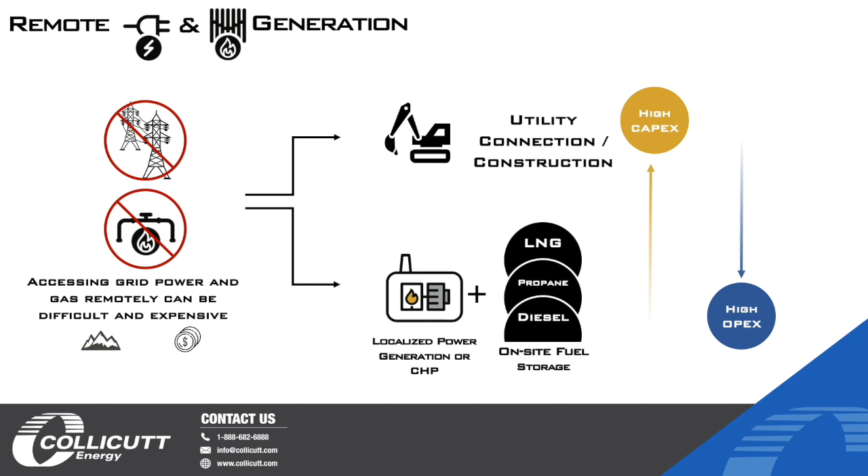So what are some of the implications of remote power? Well, the first issue is that it's expensive. In fact, some communities in the north pay as much as $1 a kilowatt hour. That can be as much as 20 times what some people are paying. The second issue with that is because most of this remote power is diesel powered, the CO2 output per megawatt hour is much higher than what we produce nationally. In fact, straight diesel power is about 425% higher than the average electrical production all across Canada. So those are the 2 reasons.

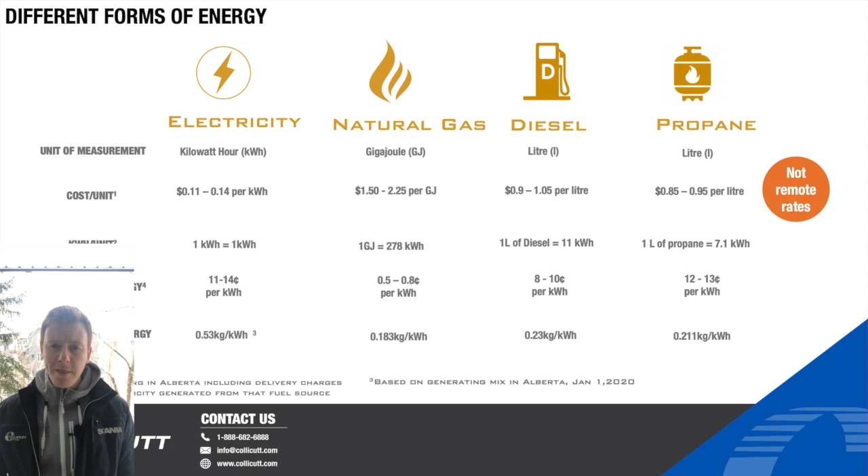Now, before we get into some of the benefits or some of the technologies, I really want to talk to the topic of different forms of energy. Now, one of the things you're going to see on the screen is 4 different types of energy. There's electricity, there's natural gas, there's diesel, and propane. And one of the things you're going to see right off the bat is that electricity, diesel, and propane, now, all of these are units of energy, not electrical energy, you'll see that the cost per kilowatt hour is relatively similar. It's about 8 to 14 cents a kilowatt hour.

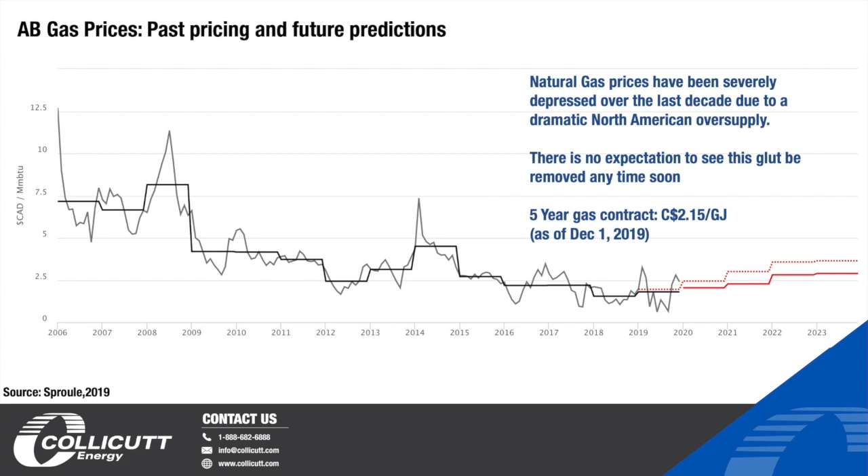Now you'll notice that natural gas is somewhere in the range of 0.5 cents to 0.8 cents per kilowatt hour. It's a whole order of magnitude less. And why is that? It's really a function of the fact that natural gas is such a clean, dense form of energy, but it's also in such surplus quantities in our North American market right now that the price has really dropped over the last 10 to 15 years, and we don't see prices going up anytime soon. In fact, there's such an oversupply, people don't know what to do with all the natural gas. Also want to point out before we move on that the CO2 output per gigajoule or per kilowatt of natural gas is quite a bit lower than both diesel and propane. So you have a fuel source here that's cost effective and significantly cleaner.

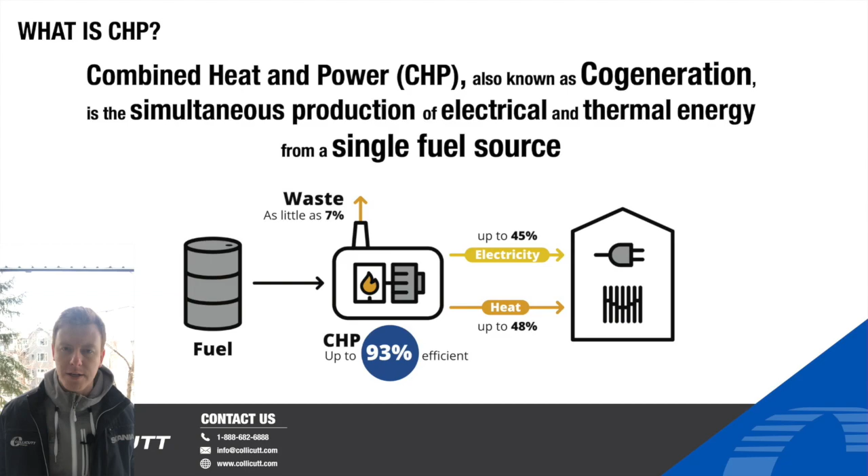So the technology I want to talk about today, and you've probably heard it in the previous videos, is a technology called combined heat and power. And what is combined heat and power? Well, combined heat and power is the simultaneous generation of electricity and heat from a single fuel source. So you have a fuel source, whether that's natural gas or diesel or maybe even propane, and you use that to generate electricity in a generator, and then you're salvaging the heat from the engine and from the exhaust, and you utilize that within the community, the facility, or at the operation, whether that's a mine or some sort of remote industrial facility. And you offset the use of another fuel type that would have provided that heat.

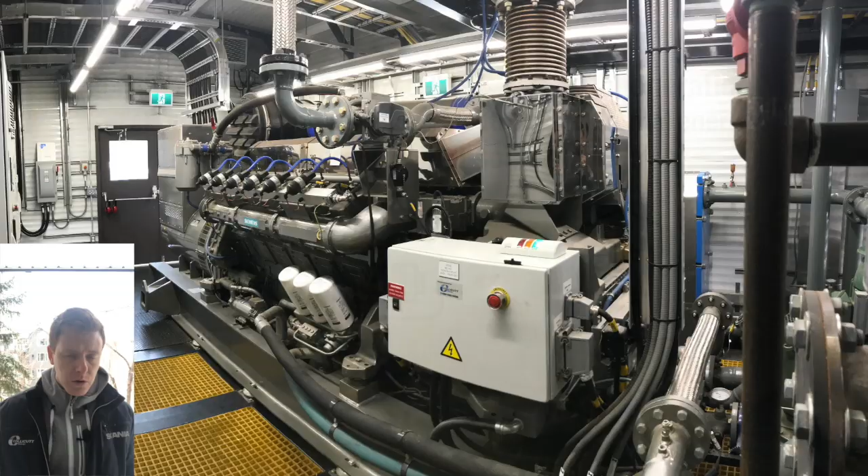So let's go into the details around why. And the first reason I want to talk to is the cost-saving benefits of using natural gas-powered CHP. Now, natural gas CHP, as you'll see on the screen, even just from a power generation perspective, is so much cheaper than diesel power generation because of the cost of fuel. Then on top of that, we're actually able to offset a tremendous amount of heating costs, again, whether that's propane or heating oil, and save the facility that much extra cost. And so you'll see on the screen there's a tremendous opportunity for cost savings.

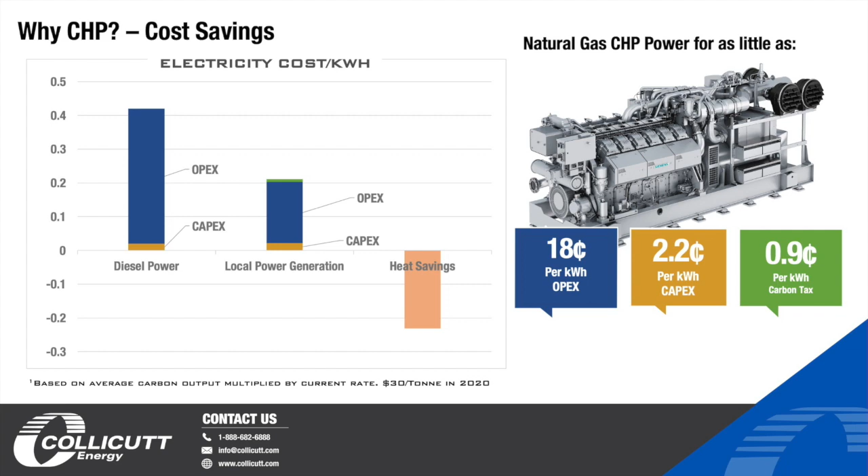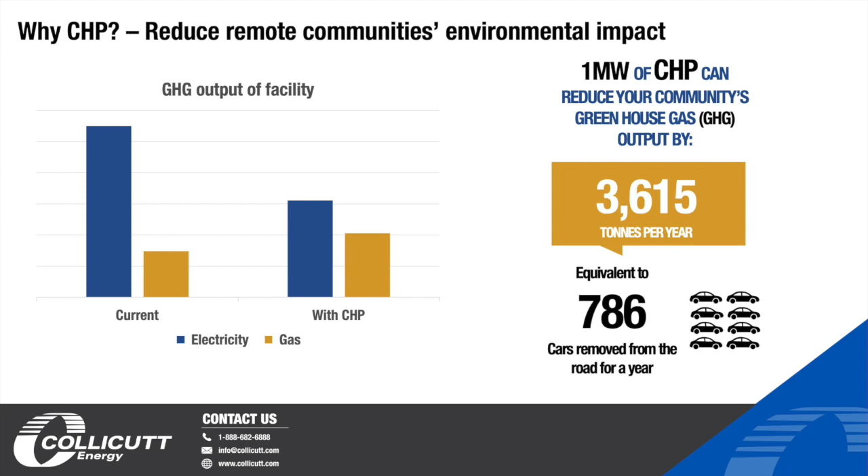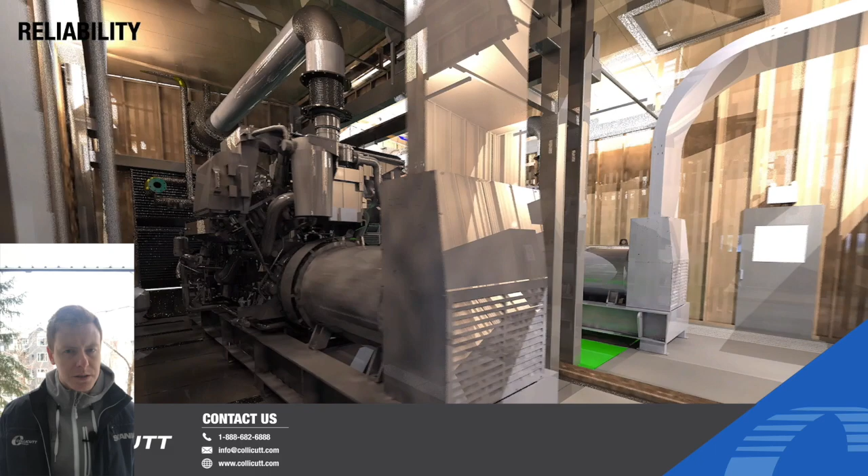Let's talk to sustainability benefits. So from a CO2 output, natural gas CHP compared to straight simple cycle diesel power generation can save as much as 3,600 tons per megawatt of power installed per year. That's an incredible amount. Now let's talk to the final reason, which is the concept of reliability. Now, one of the reasons why these remote communities use diesel power generation is it's so reliable. It's consistent. You can store fuel there. Now, natural gas can also be stored on site. Natural gas power generation is also reliable. So we have a cost-effective, sustainable, reliable option to diesel.

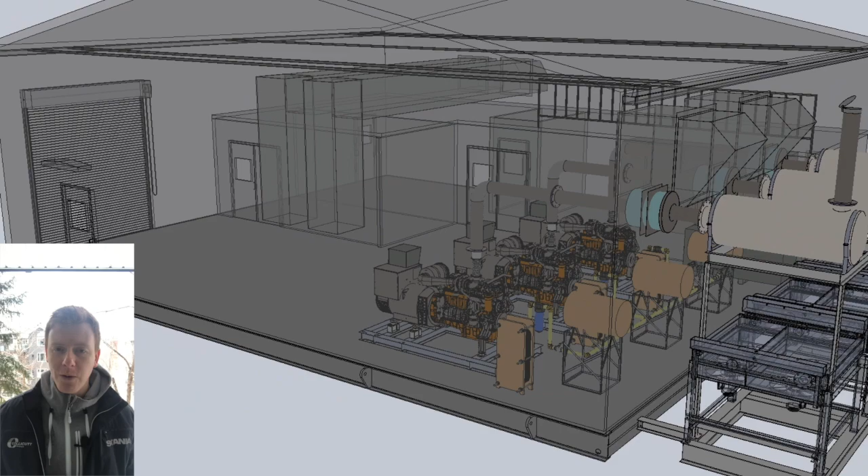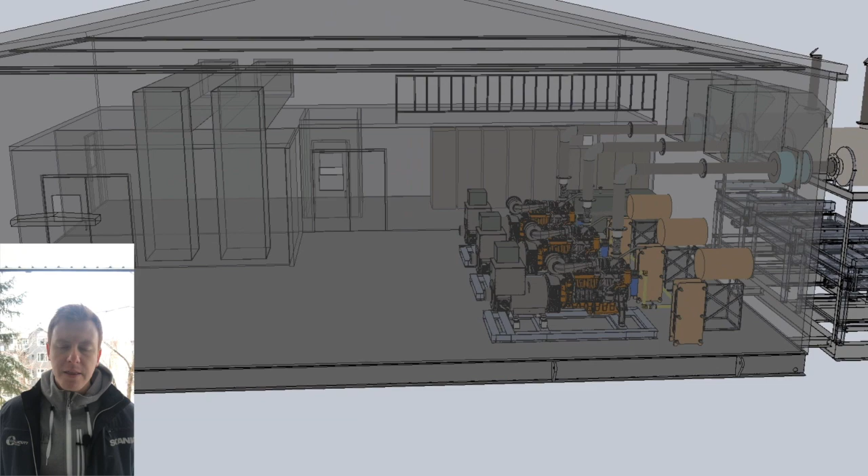Now, in some communities, you physically cannot get LNG or compressed natural gas to these locations. In fact, you fly the fuel in, and so diesel is really the only option in those scenarios. But even so, you can actually do diesel combined heat and power, where you're pretty much just taking the generator and you're salvaging that heat. And what you'll see on the screen right now is a design concept for a 1 megawatt diesel powered combined heat and power system that would go to a remote community. This is a design that Collicutt designed using 3 engines, and we're salvaging that heat. And what we're able to do is offset the heating load that would have been utilized by a boiler system that would have run on propane, heating oil, or potentially even diesel.